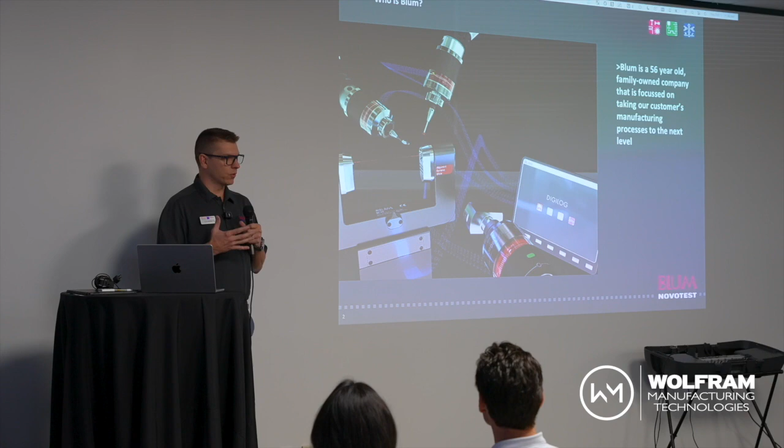So just a little bit of background on who Blum is. Very well-established company, based out of Germany, 56 years in the industry. Machine tool design company that said there is a better way to do metrology inside the machine. So a very high scale look at who we are.

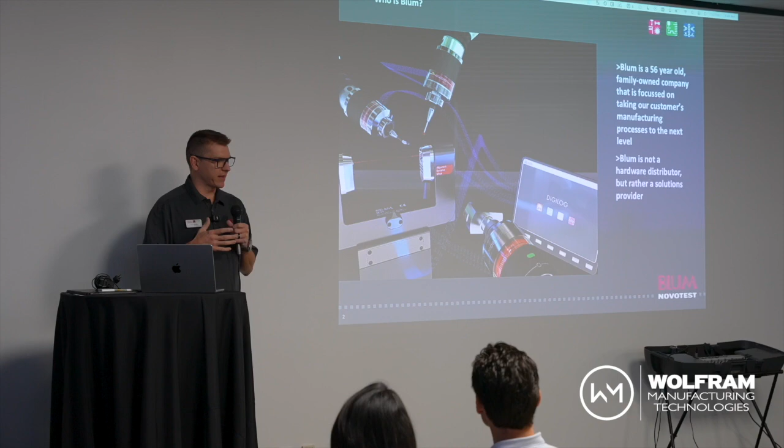We are not a hardware distributor. We try and be a solutions provider. We try and be a partner. We have a lot of interesting feathers in our caps that are not metrology related. The founder of our company invented the umbrella style tool changer for Stama that went to robo drills. So that is the level of design engineers that Blum started with.

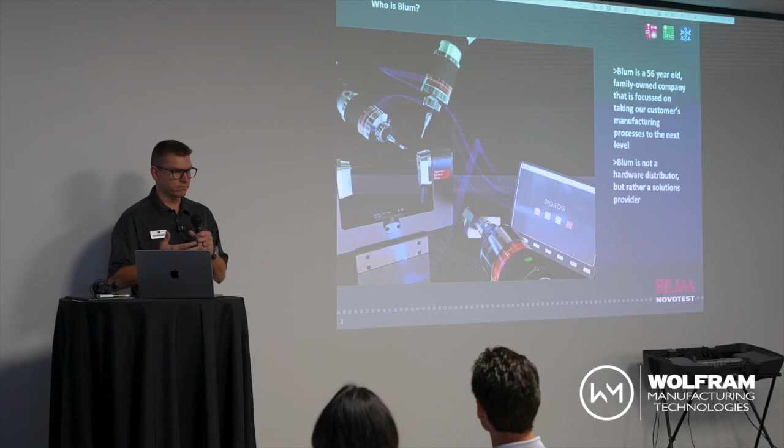And you can fact check me on it, it's patent number 4103405 in 1979. Again, we don't want to be a vendor, we want to be a partner. There's a lot of companies out there willing to ship you a box of hardware, and that's not us. When people ask me, hey, I want this laser, I ask questions. I don't put it in a box and ship it. And if that's what you guys like, then Blum may not be your cup of tea, and that's okay.

Again, we are a global company. We have a strong presence in North America. But just to get into a couple points of what we do, there's traditional tool measurement. We offer in-process laser measurement, tactile tool measurement. There's a lot of different good tools out there to measure tools.

And none of these solutions are wrong. There isn't a right and a wrong. None of them are obsolete. All of these still serve a purpose. And I will go through a couple slides of just why I think Blum is a great option.

A little bit of history of the Blum laser. Blum invented the first in-machine tool measurement laser in 1987. It was gas-powered, it charged up, and it shot a beam through the machine envelope, and you better hope your tool was there to be seen. Otherwise you're waiting again. But this product has evolved.

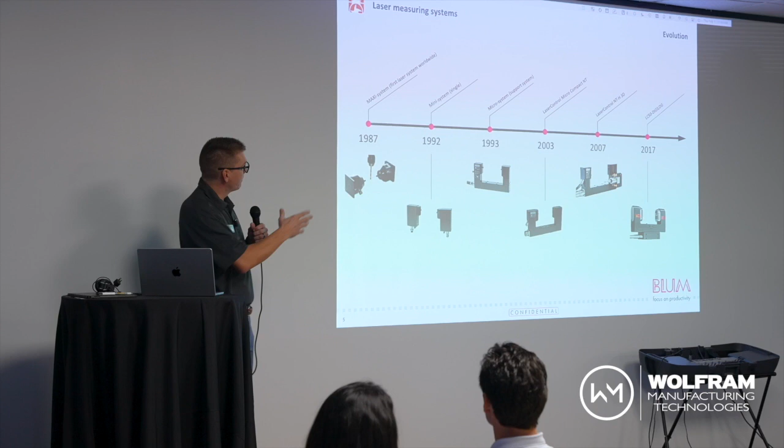We can go 2 meters between transmitter and receiver and still measure your tool with very high accuracy quality, where we live in the world of microns, not tenths or thou. Our latest laser, released in 2017, is the LC50 Digilog. Very interesting product, and that always goes into the next question of Digilog.

What is it? Why is it different? Why should we use it? Why should we pay attention? There's this big push that digital is the answer, get away from that old technology. We found that the combination of both of these two communication protocols, these data methods, were relevant.

So we don't want to just enter and exit a beam and measure a tool. We want to dwell in that beam and gather hundreds of thousands of measuring values per second, as opposed to, is it a 1 or a 0? Am I breaking the beam? What is it?

So we've developed this technology, and it's just what we found to be the most stable way to measure a tool inside an environment with dripping coolant, sticky chips. It's a tough hurdle to overcome, but we have a very nice way to overcome it.

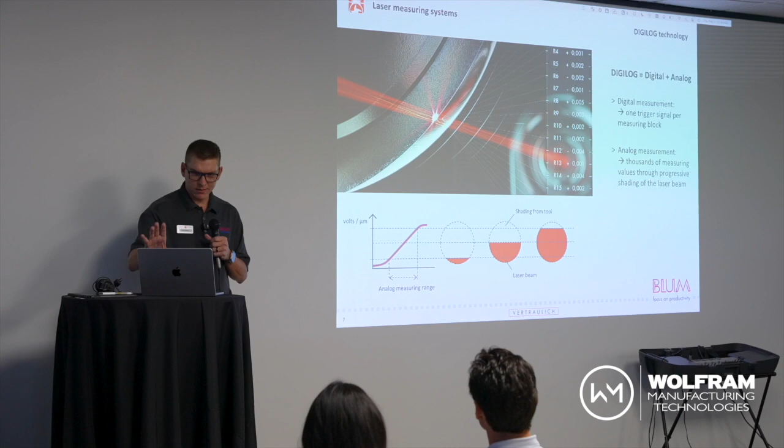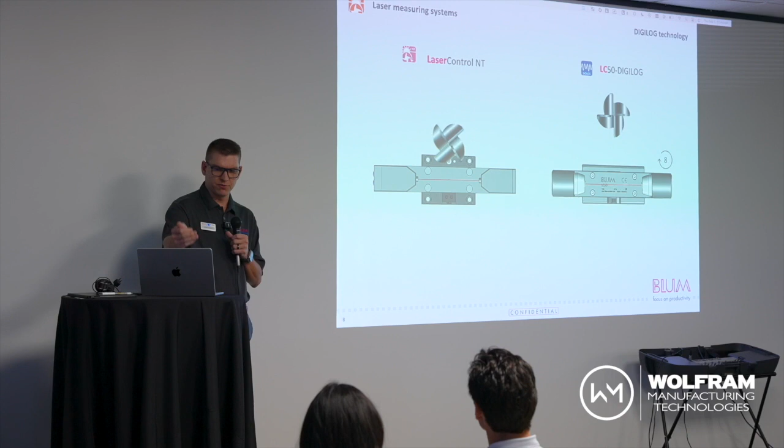Again, just a little explanation of digital and analog. Digital, one trigger. Analog, we're shading and collecting data. What that means for you is the traditional method of digital measurement: you find the edge of the tool, you break the beam once, twice, three times, and we give you diameter, length, whatever it may be.

This was the best way at the time to do it in the industry, but it was a cumbersome process. It was slower than what was accepted, and it seemed to be reserved for advanced manufacturing people - let them do that, they make high-end parts so they can justify this cycle time.

What we did was, now we still have that search function, but instead of entering and exiting the beam multiple times, we do a search, a fine search, and then in 8 revolutions of the tool in the beam, we've gathered enough data to tell you the geometrical value of that tool - length, radius, if a flute is chipped - a lot of information.

Just a little bit of visual on how much faster it is, a quick little side-by-side video. It does not want to play because it goes to my solid state, so we're going to skip over that.

Moving on quickly to some more features that we offer is touch probing. Touch probing is becoming more and more necessary. As Nathan mentioned, we want fingers off the control.

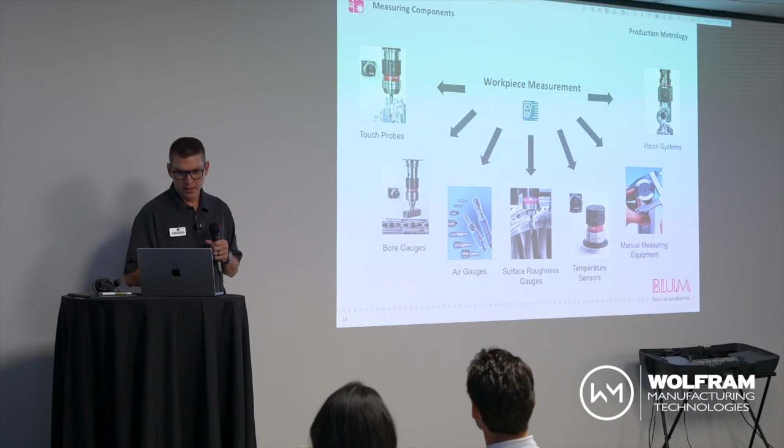I have a piece of equipment that measures parts, I'm wasting time, and I would never ask you to measure every part, measure every feature, but there's critical features that make us a necessary evil. And I don't like to say it that way, but I mean a necessary evil, you have to have part quality.

And our philosophy is, if you have to do it, you should be able to do it as quickly and reliably as possible. So again, coming from the machine tool world, 400 millimeters a minute probing speeds doesn't cut it. We probe at 3,000 millimeters a minute. Two touches, spindle orientation doesn't cut it. We are one touch, moving on.

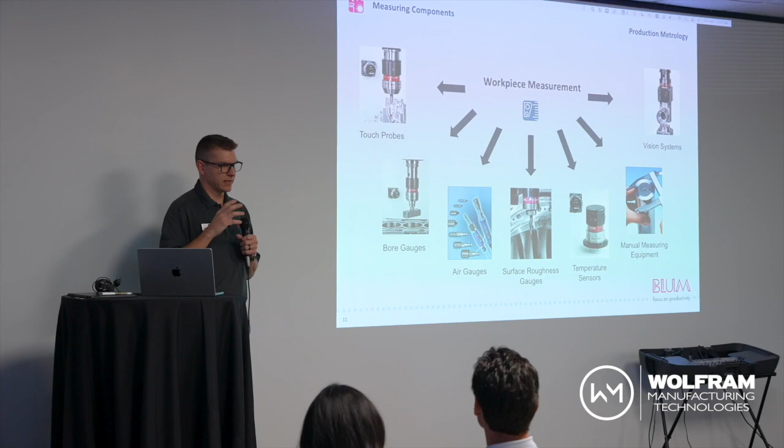It's a non-mechanical trigger. We can't have wear. We have to have a wear-free trigger. We developed the laser, the same principle as in the probe. A pin breaks a light barrier. We can't have mechanical contact that wears over time, because the same feature will now have wear like a tool does.

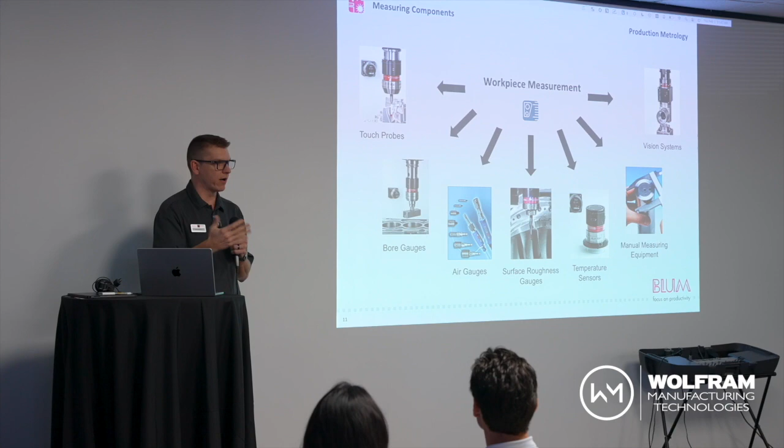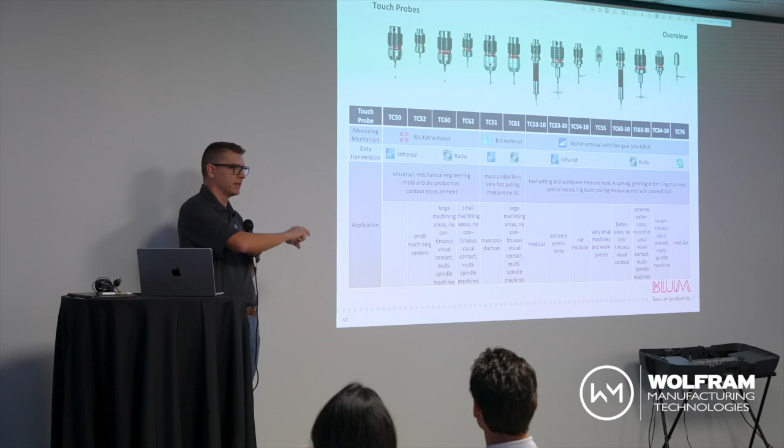We have the big onslaught of product, just like everybody else. It's a broad product offering. And the major difference is just where we come from. We manufactured it for the CNC machine. We didn't adapt technology that existed and say, man, we can make money by putting it over here.

So again, it's a cultural difference. It's a mentality of how would we do it? Not what can we sell or how can we make money, but how would we do it if it's our business? So again, it's a broad product line. Everything's IP68 rated because we want you to clean your part as you probe it. So again, very, very different philosophy, different mentality.

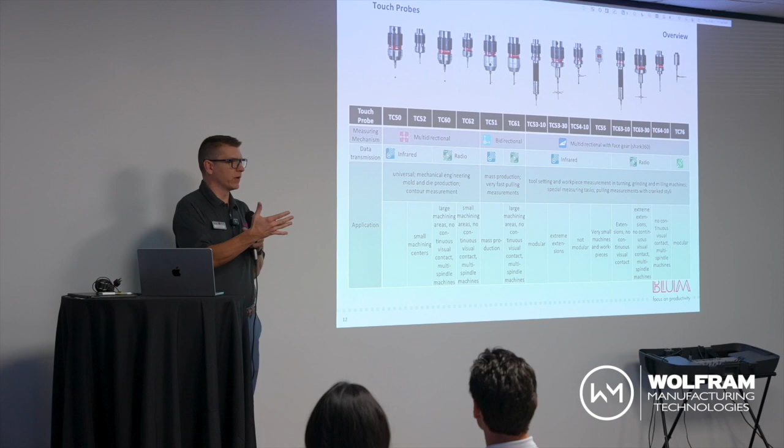And that is really the only thing that you should be concerned with. What makes Blum different is we want you to succeed. I don't want to send you something and you don't enjoy it. That's my fault for not doing the legwork on the front side.

Again, we'll skip over a couple of these videos because I don't think they'll play. So the biggest question is, what is advanced manufacturing?

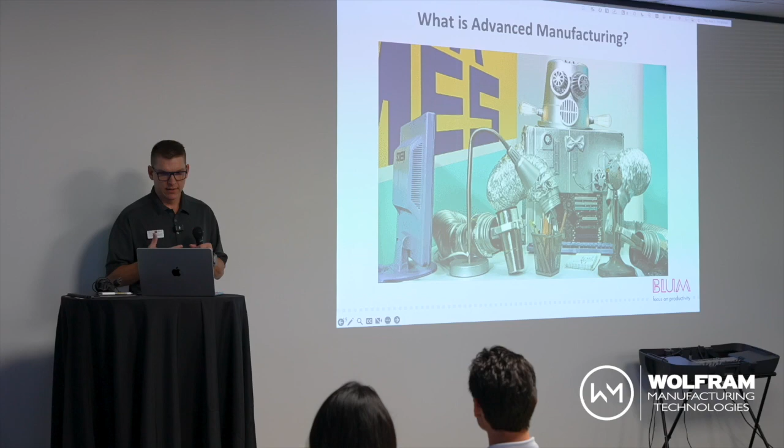I think we were so premature with this launch of Industry 4.0. I think it's a great idea, but we didn't have all of the tools to really understand it. And people say, hey, what is advanced manufacturing? And I say, I don't know.

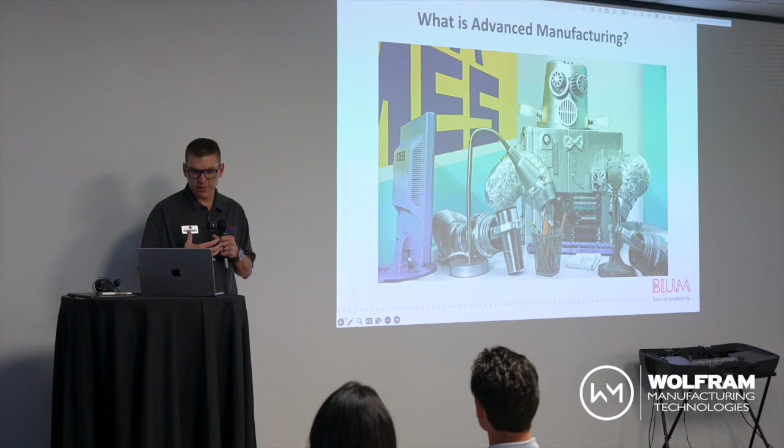So the only thing I know is that I am a small piece of the puzzle. You have to understand that you have an offering as a company that sells machines, makes parts, sells probes, sells lasers, that you're just a piece. You don't have every answer. So I feel that what I offer in conjunction with other offerings is really what takes people to the next level of manufacturing.

So the biggest question, and this is where I wanted to focus a lot of my time, is, okay, well, how do I get there? And I'm not sure if anybody's heard this phrase, but I've been kind of hearing it thrown around a lot, is data is the new oil.

Data is the most important thing that we can capture. And I think there's a lot of people out there that will say, I can give you all this data, and I would kind of call them them. You know, yes, they can give you data. But then there's companies like Blum and Karen and all these other vendors that are out there that I like to consider an us, where we give you data, but we don't tell you what data you need. That's, I think, the biggest sticking point.

And it is impossible to manage what you can't measure. If you can't measure it, you can't manage it. If you don't know about it, you can't fix it.

So what data do you need? And just to keep the analogy going with data and oil, I find data that is offered by the majority is this crude, unrefined oil data that is not useful. It's a bucket of mixed up Legos.

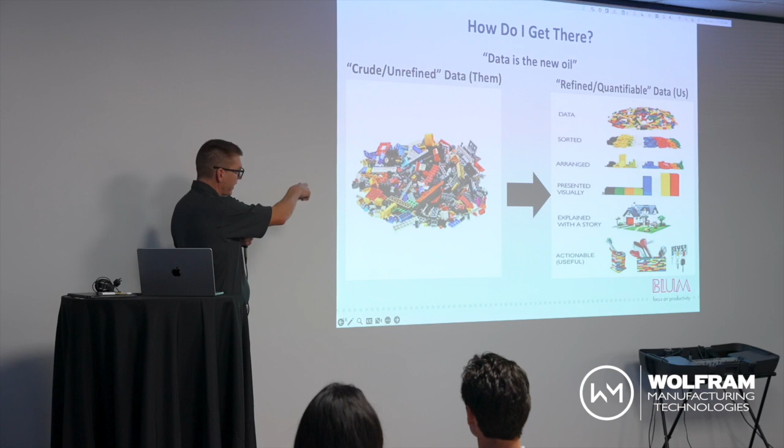So there's a crude and unrefined version of data that a lot of people will give you. And I feel like what we do is an us. We give you this data. You tell us what it is, and it's the pile there, but then we take it and we do something with it, which I think is the problem. People collect data and it's their data that they have, but what do you do with it?

So what I like to say, the offerings that we have quantify it, sort it, arrange it, visually present it, and then ultimately make it actionable for companies. And Nathan talked about it. You have to know these things, and people aren't going to willingly admit their mistakes. You find out about it and it kind of stinks.

So those are the two different offerings that I see as very predominant in the industry, of people thinking 4.0 is something that it's not, and telling you that they can get you there. But anytime I hear somebody say, I have all the tools, it makes me very skeptical at first, because I don't think one sole provider can give you everything you need.

So, stepping into advanced manufacturing, how do I do it? I think there's a lot of good answers to that question, but again, understanding that it's not just me, it's Ryan over at Omega, it's Rob, it's Nathan, it's Haimer. All these tools are a piece of a large puzzle with vendors like myself. It's my job to not just say, hey, look at all this cool Blum stuff, but there are other offerings out there that in conjunction with mine can really help you out.

We have to think of ourselves as a resource, and we have to have a passion for manufacturing, because when it grows here, it transitions. It's such a tiny industry where everybody knows everybody. You can be in a different state and see people you know. At these events, you see a lot of the same faces. But again, just an idea of how to get there.

There are processes, and this is a touchy subject for me because we are constantly pitted against: why would I measure my tool in the machine? I put it on my Omega presetter and it comes off dead nuts. Sorry if that's inappropriate, but it comes off with high accuracy. And it's a very clear answer that a tool spinning at its nominal cutting speed does not look like that. But this tool gets fingers off the control, and that should be our goal.

A 7% mistake rate is alarming, and it's not our dad's manufacturing. My dad's in manufacturing at Cummins, and he says this process doesn't work. I still get my notepad down. I've had him take Nathan's test, and I had a good laugh. He did not, but it gives some validity behind these things.

So am I a competitor of a tool presetter? I am not. I am different. I am in conjunction with. Use that before. It is a valid tool. Then the laser: if your tool cuts at 10,000 RPM, measure it at 10,000 RPM. Maybe you have Z-axis suck up, and now your tool is shorter than what it said on the tag, on the chip. Update that tool.

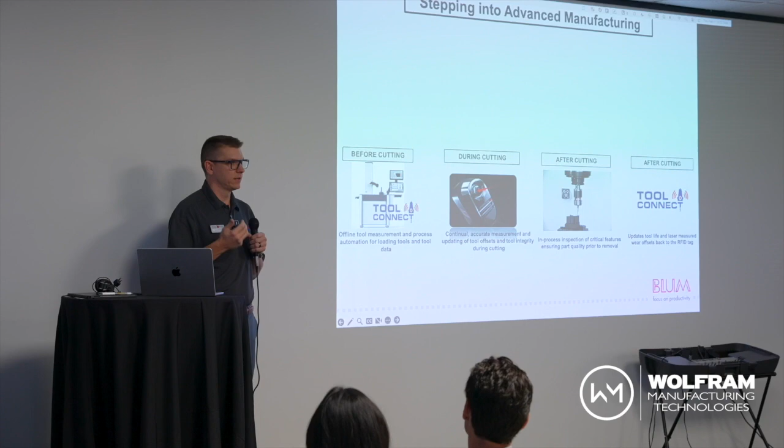Get that data written back to the tool so it can come out of that machine, or operator A has a tendency of unloading a tool and taking it to a different machine. Know how much life is on the tool, know the geometry, know the wear, know the state of what it's doing, because operator B is going to pick that tool up and say, yeah, it looks good, run it. And now you have a hiccup in your process.

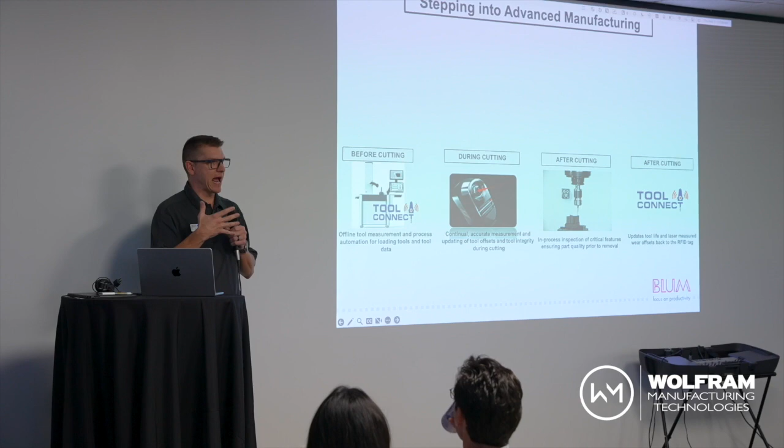And again, I don't think this is the answer. I'm not saying, here's your answer for advanced manufacturing, but this is a step in the right direction. And it's all of these tools. So again, we just got to kind of sit back and not have this mentality of it's me versus somebody, or I compete with them. All of our products serve a purpose and have a place.

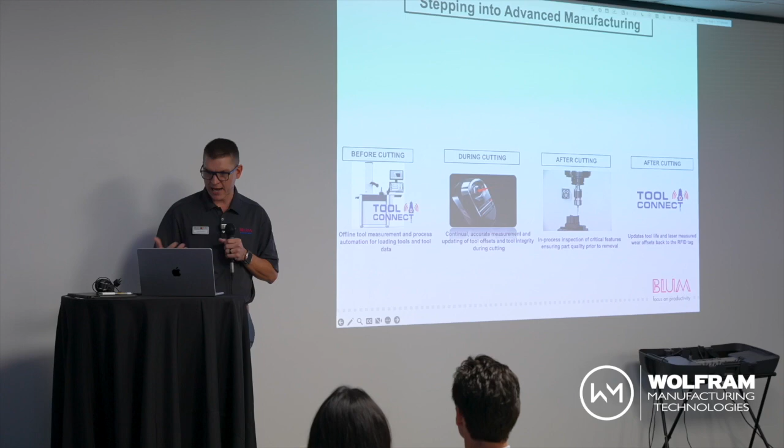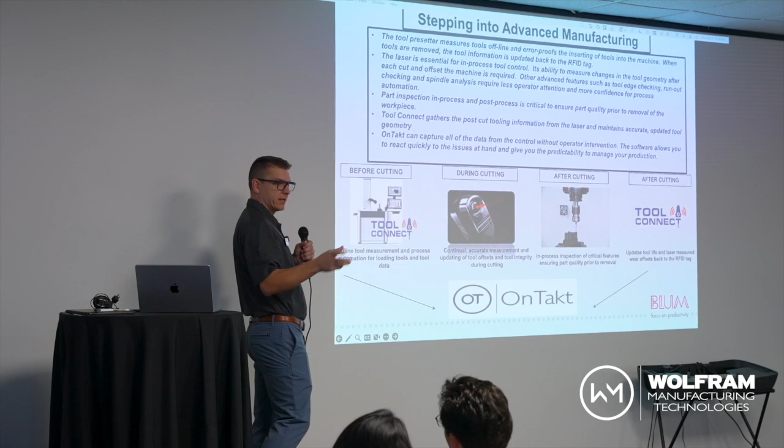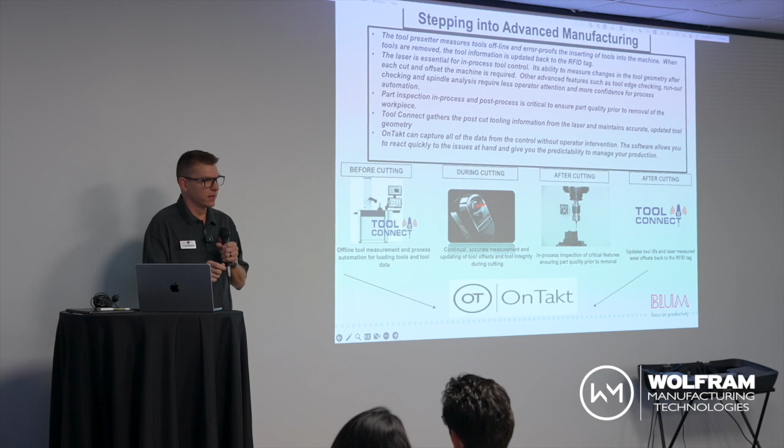Again, just a little bit of a flow here. You have one last piece of the puzzle. You have all this information, but Nathan's software that he showed, you have to somehow present this visually, because you can't have 30 pieces of paper that you have to flip through to figure out, okay, why did the machine crash, or why is the machine down? Well, let me look at the tooling data. Oh, I got to go here.

You have to have this, and I'm not saying, sorry, Nathan, that this is the only answer. I'm not saying that's the only answer, but you have a perfect opportunity to see if this is your answer, and you don't have that opportunity every day. We're small companies that cannot be at every facility. Our job is to educate, but you have a unique opportunity to see how all of these tools can be sent to a database, to a software management tool that now presents it visually so that it doesn't take a data scientist to interpret.

Operator A looks at it and says, yep, red is bad, green is good, we're good. Or my phone made a ding noise. What was it? Oh, better go change a tool. So again, we have all of these tools that on the surface people say, man, can't believe that guy's talking about that. But there are valid arguments behind why you need all these things.

But again, the biggest thing I wanted to kind of leave with is you can't manage what you don't measure. And a lot of people don't want to measure statistics because they don't want to know how bad they are. People want to high five and say, we did great, look at how great we are. But again, we have to have systems in place to take it and make this data actionable.

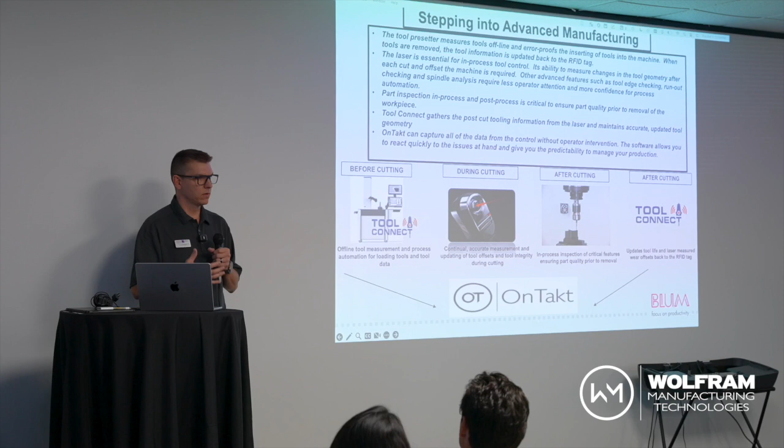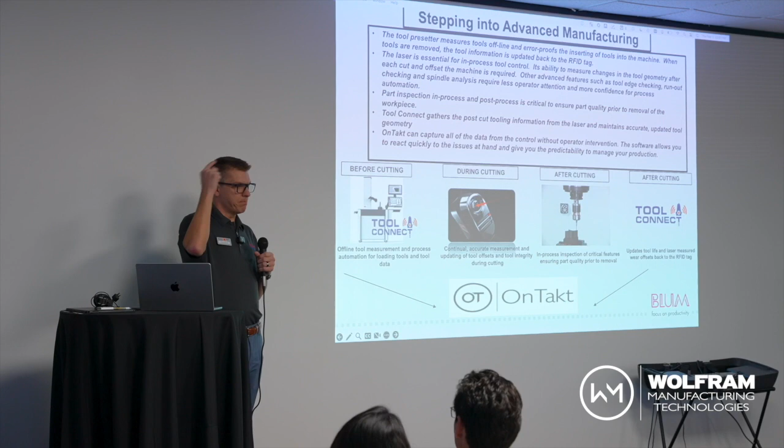I mean, we have to stay competitive in this market, and our goal with the tools we offer is to keep cost per part low and make our customers competitive. So there's an investment from both sides. So that is really like my maze that kind of came out through PowerPoint of, I think there's a lot of gray area and people are leery of talking about it and they don't want to know about it.

They don't want to know how bad they are, but manufacturing is in such a unique spot that can take us, my kids, I have 2 boys that are 10 and 7. I would love for them to get into manufacturing. I think it's the coolest thing. They want to be in the NFL, probably not in the cards, but I bet you can be a machine operator, and it's a super cool job.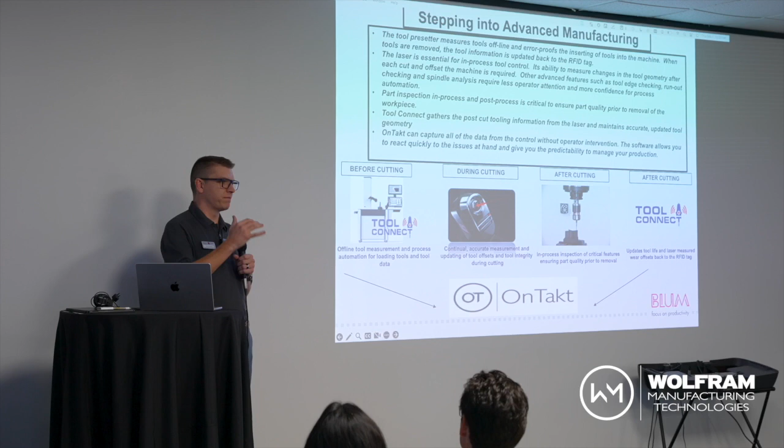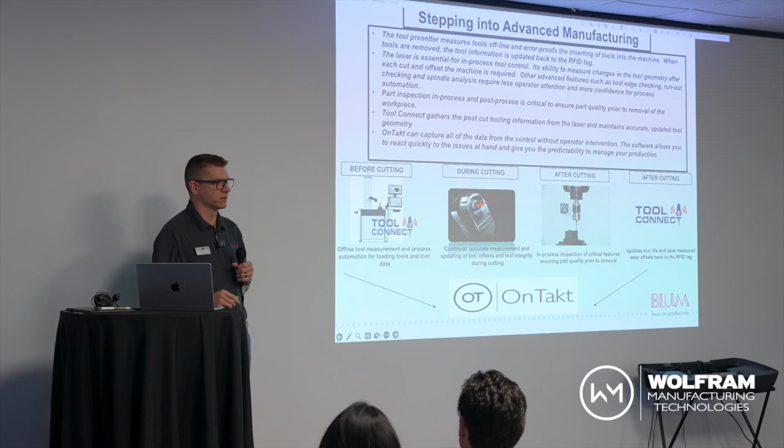But again, I think we need to invest into the future of manufacturing, make it personal, make it actionable, and share each other's information, share each other's successes, and not worry about, I may not get that sale, because really, if we're doing it right, we all are a manufacturing family that kind of succeed together. So we're really reliant on each other for success. None of our companies are big enough to promote to every job shop, every big shop. And that's really, again, kind of the maze that was in my head that came out on paper.